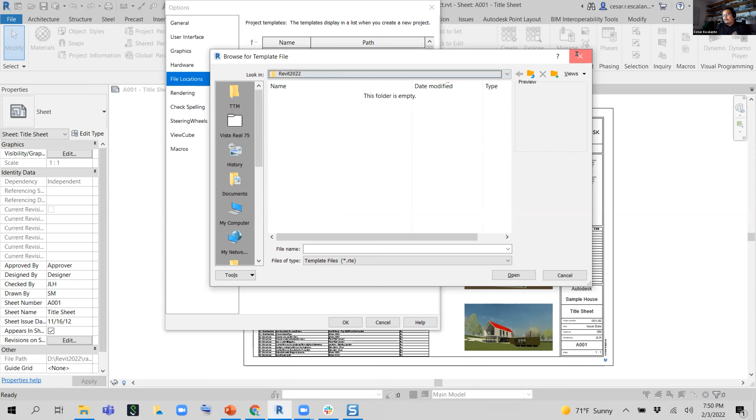Now, if you're working in your office, probably your BIM manager has directed you to add a path to the company template, which usually resides somewhere in a server. So if you're in an office environment, you probably have a server location as well if you have local templates. But this is how you add more. So if you're missing some templates and you know they're living on your server, you can add a value and then browse for a place in your server to connect to your template. If you don't know that path but you know they exist, you probably have to ask your organization or the BIM manager. But these are the ones that ship out of the box: some imperial construction, architectural, structure, and metric.

The other one is this path, which is the default path for user files. So when you open Revit and say file open, Revit opens at the location where it's going to look for files. I think that's what this path is. It's also the path where local files in the work sharing environment are saved. We're going to talk about work sharing towards the end. So when you create a local file, this is the local path where it's saved.

Some organizations standardize this path. I remember when I was working at HOK, it was C Revit local, and everybody had a Revit local folder on their workstation. So when they opened the central file, the local file was saved in this path. And then the other one, which I think Joe was talking about earlier, is this one, which is the default path for family templates. This is pointing to a place on your local workstation.

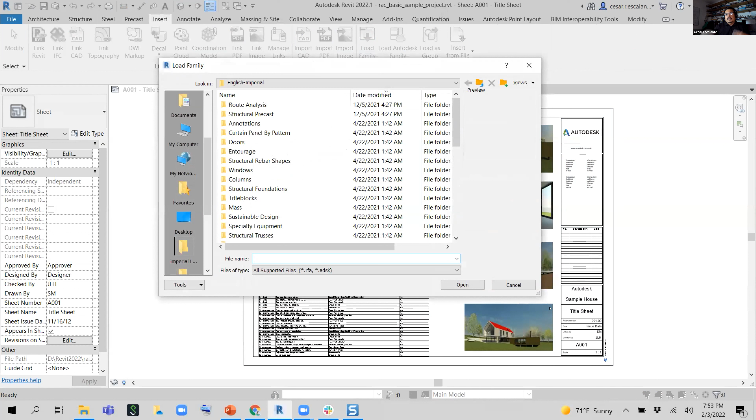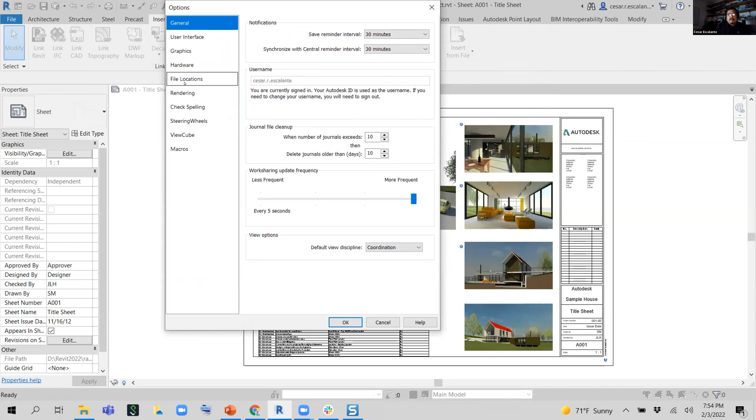So if you are loading a family, you go Insert, Load Family, and you receive a message about an improper file path, or you don't have the right path, that's probably what's happening: you don't have this default path set. You need to point Revit to where to load the default family template. So again, I'll repeat it: it's under File, Options, File Location, Places, and it's the Imperial Library.

All right, so hopefully that works, Joe. I don't know if you tried it, but hopefully that fixes the issue you were reporting at the start of the class.

Okay, the other topic was some basic 101 concepts that I need to refresh. I didn't talk about this last class, and it's on this slide here.

So Revit has any model representation, any virtual model representation in Revit has three types of building elements. You have building elements as model elements, datum elements, and view specific elements. Again, this is Revit 101.

I don't know what's going to happen next Thursday, but on the next test I'm going to ask you this: what are the three types of building elements? You have model elements, datum elements, and view specific elements.

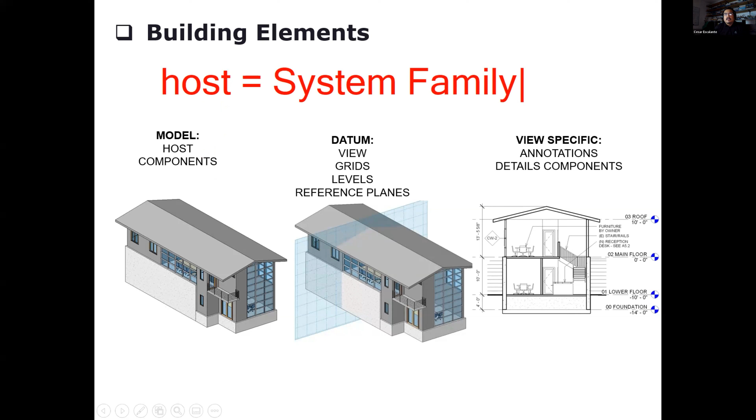A host is also called a system family. System families are elements that you cannot load inside Revit. For example, walls - you cannot save a wall as an external component. You cannot save a roof as an external component.

System families are families that only live inside a project. That's why they're called system, because they are only available in the context of a project, but you cannot save it or export it.

You cannot make a system family a component. The reason for that is that system families are typically created by a set of custom boundaries.

An example: walls have boundaries, they have sketch boundaries. Roofs have sketch boundaries. Ceilings have boundaries. Floors have boundaries. Elements in Revit that are created using sketch boundaries are called system families.

So examples of system families, I mentioned already, and I'm going to show you how to create a floor today. That'll be your first experience on how to create a system family.

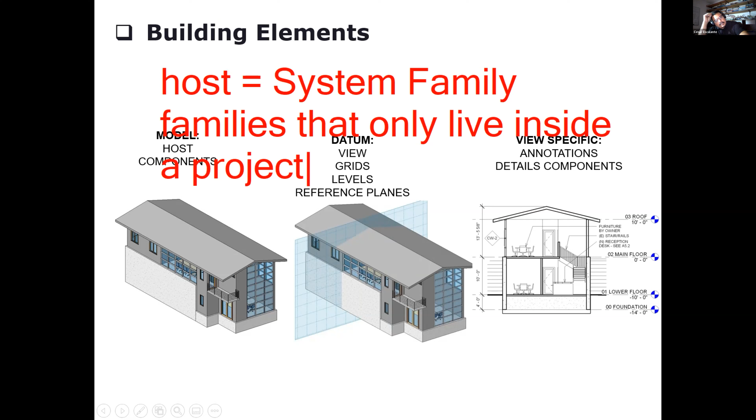Datum are objects, usually reference planes. These are work planes that intersect the model. A view by default is a reference plane - you're actually sectioning the plan either vertically or horizontally to get a projection view.

The grid lines are work planes, and they're work planes that span multiple levels and are aligned with the representation of a column grid. A level is also a work plane, and they remain associated with the top of the finished floor. That is where a level is.

Then you have custom reference planes that are used to drive and create any type of geometry. So views, grids, levels are called reference planes.

Then we have view-specific objects, which are elements that we place on top of a view that describe the design intent of an element in words. So annotations are all view-specific.

When you place a keynote or a call out or a leader, those are elements that live on top of the view, and they are view specific - that's why they call it that. If you place it in the floor plan, they only live in the floor plan, they don't live with the model. So if you're coming from a CAD background, it's equivalent to having things placed on paper space.

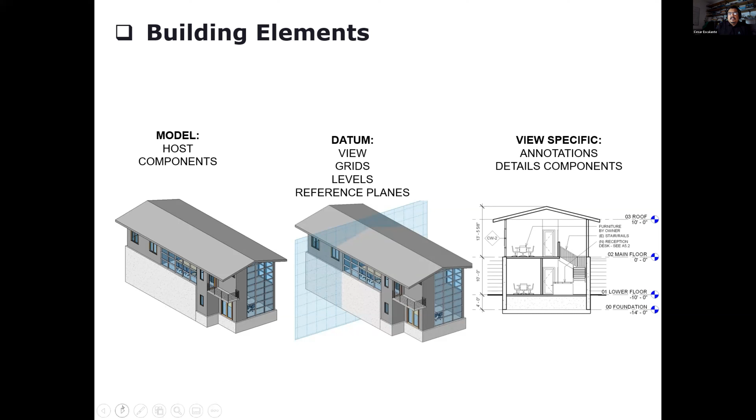So remember, model, datum, and view specific objects are the three types of building elements. Here is another way of representing this idea.

Model elements, you have host and model components. Datum elements, you have grid levels and reference planes. And view specific elements, you have annotation objects like text, tags, symbols, and dimensions.

You also have detailed components, which are enhanced two-dimensional representations that are placed on top of a three-dimensional object to enhance the communication of the view. So detail lines, fill regions, a hatch that is placed on top of a view - for example, that is a view-specific element.

And this is how elements are organized. Why is that important? Because I want you to understand, when you are in Revit and you're looking for a specific type of wall, remember that a wall is a system family. If you load a family, you're not going to find a wall folder in the Imperial Library. You're not going to find roof in the Imperial Library. You're not going to find ceilings in the Imperial Library.

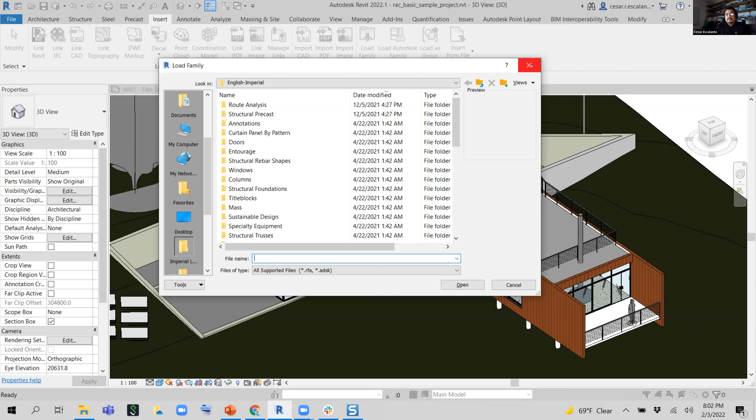System families cannot be shared as independent files, and the library of components does not have that. They only live inside a project. So how do we share system families? You can copy paste it.

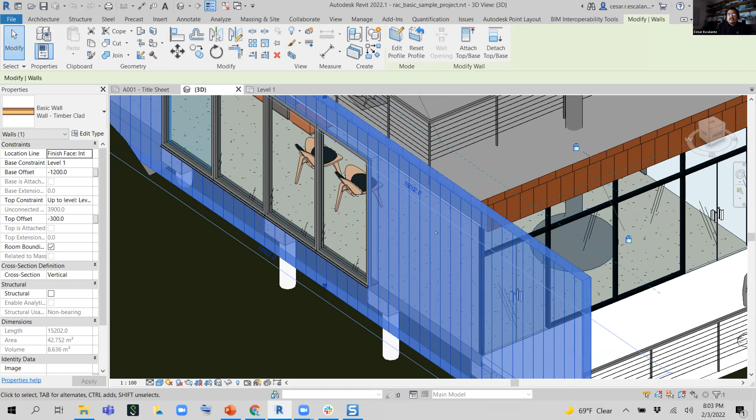You don't have to do this, I'm just doing it to show you. I'm going to create a new project from scratch. And let's say in this 3D view, I really like the treatment of this timber wall file. Rather than building it from scratch in the other project, I just copy it to the clipboard. You can do Control-C, then jump into another project, and do Control-V.

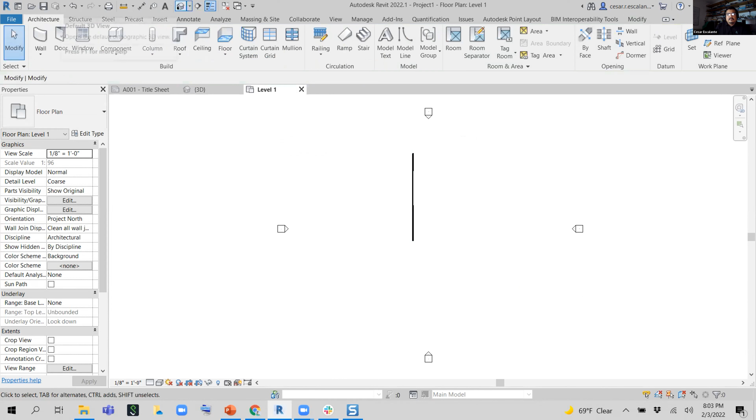It also brings hatch definitions, and you place it. As soon as you place it, this type of wall is available as something that you brought from another project. So the timber wall is right there, and it comes with all the hatch definitions. Copy paste is useful when you have spent a lot of effort in another project.

But then if you're going to start copy pasting from multiple projects, that is a problem, right? So a strategy that a lot of companies do is to create their standard of walls into a single project. And then they build this collection of walls that's sitting in the central server. All you need to do is grab the interior partitions you need, and then paste it into your project. That's one strategy of dealing with that.

Let me see, I may have placed in the D drive an example of that. Yeah, it was in this one, it was in my wall... No, I don't have it. I'll bring it next time. I need to dig into my files.

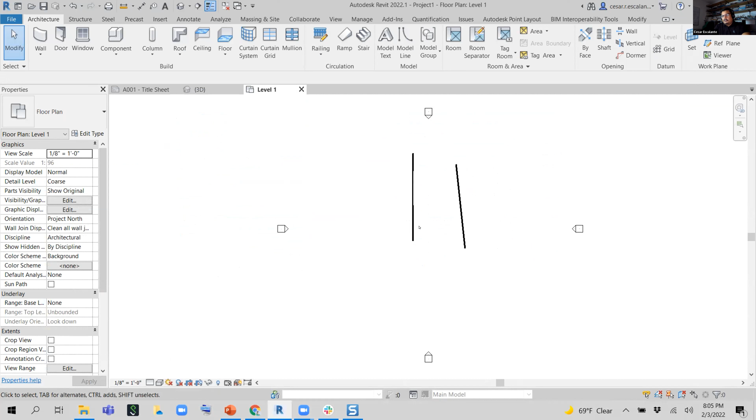But it's a repository of walls, nicely, neatly organized with the right tags, the right information, and rather than rebuilding it every time from project to project, you just copy to the clipboard and paste it, and that's the way to distribute those type of families. But it's a Revit project, it's not a Revit family. So the bottom line: system families cannot be shared as external files, and system families only live in the context of a project.

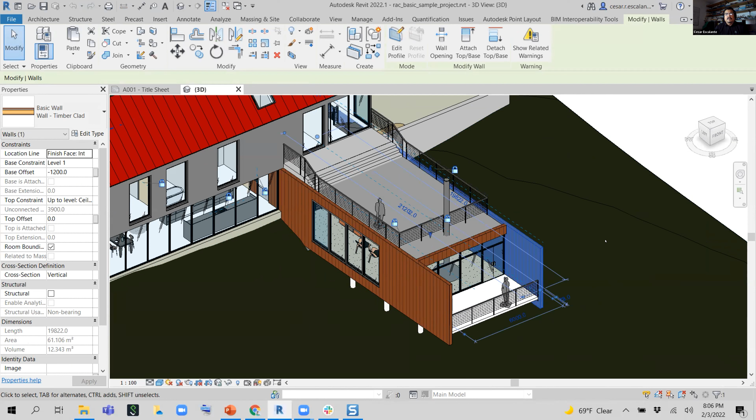And system families cannot be... you can share system families using repositories of elements. So how do I know if something is system or not? It's by accessing something called the type properties. I'm going to talk about that now. This is called type properties.

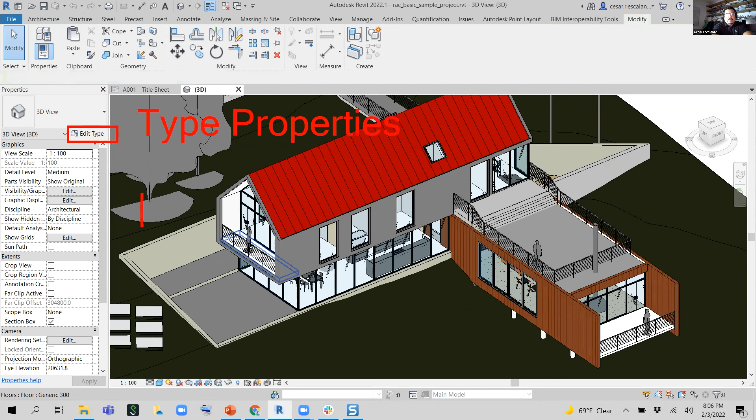A type property is a parameter common to elements of the same type. In other words, every wall that is a timber clad have similar dimensional properties, and that is a type property. If you change the dimensional property of that wall, it changes for all the walls of the same type. Another example, doors: if the type of a door is 8 foot high, all the doors with that dimension, that is a type property. If you change that property to 9, all the doors are going to change to 9 foot high.

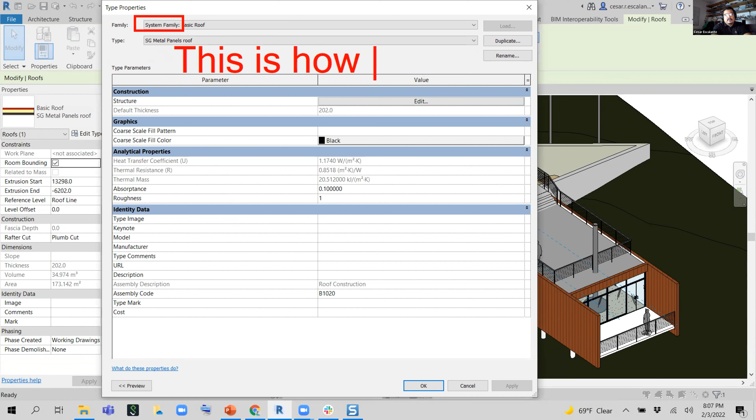When you access the type property of an element in the property window, you're going to see that right at the very top it says system family. This is a roof. This is how you find if something is a system family, in case of doubt.

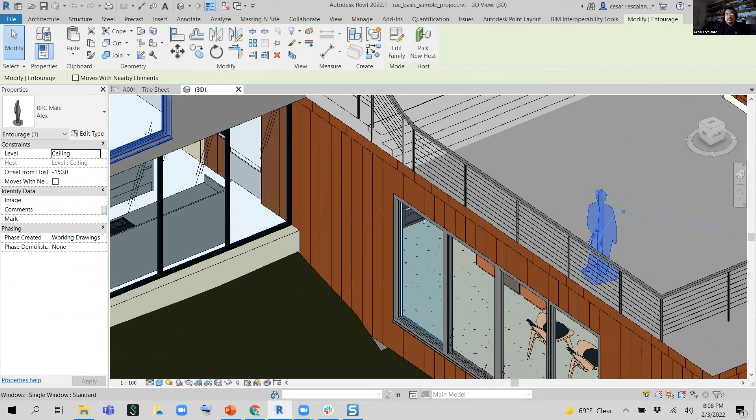Let's see this guy here, his name is Alex. Is Alex a system family or not? You edit the type and notice that it doesn't say system family. Therefore, this is a loadable component, it's an RFA. But for the most part, the rule is that things that have big areas are system families.

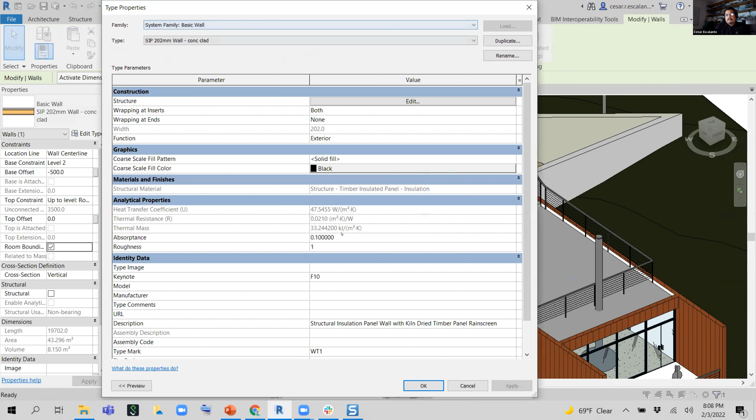I'm going to pick this wall, for example, and edit type—it's a system family. Now I'll select this other guy, which is a fireplace, and that is not a system family. That's a component. That's a visual way to check if something is system or not.

And why is this important? Because it impacts the way you exchange information with other models. The project browser doesn't display that information. When you go to the families, this is a collection of loadable components and system families, but it's not clear here, because you can see walls, ceilings and floors, but it doesn't tell you whether it's system or not. So I wish there was a way to sort them out so you know what you can share and what you cannot share.

All right, back to my slide.

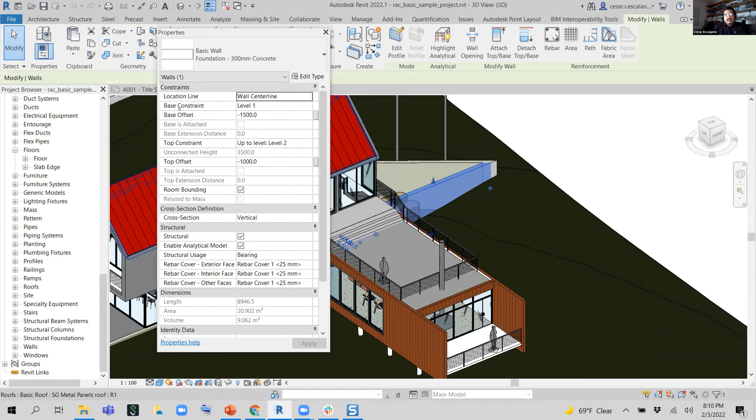Parameters: there are two types. The window properties display two types of parameters. The parameters that are unique to an object are called instance parameters. When you select something on the screen, anything displayed in the property window is called type, instance, family, instance properties. An instance property is a parameter unique to an object, to an element. So if you change the instance parameters, it only changes it for that object, not for the entire collection of types. Instance and type is an important concept because when we create families, we need to decide whether a parameter is unique, an instance, or a type.

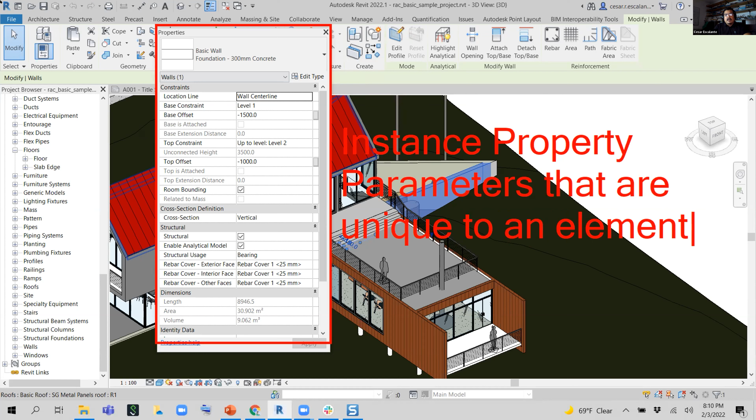If you click edit type, these are the properties of all the types. If you change it here, you change it for all of them. And the properties you see in the property window are instance parameters. That's going to be on the test next time, so it should be a breeze.

Type versus instance, and why is it important? Because when you create a new project parameter - a project parameter is a custom piece of information you add to something - let's say I want to add a new project parameter to the doors, whether it's purchased or not, you need to decide if that parameter is going to be a type or an instance. When you create custom pieces of information, you decide whether it sits as a unique parameter on the property window, or sits inside edit type. So when we create custom parameters, we need to decide whether it's type or instance.

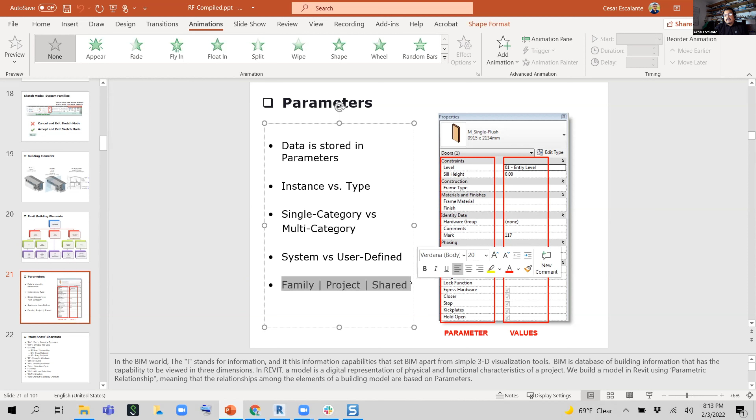Instance and type parameters can be single category, meaning they only apply to a specific category, or they could be multi-category. For example, everything listed under identity data is usually a multi-category thing. Material is a multi-category parameter; you find material across multiple categories. Then we have family parameters, but we'll deal with this when we create custom content, a family from scratch. If a parameter is created inside a family, it's called a family parameter. We're far from getting there.

All right, this is a summary of what type and instance is: instance properties and type properties.

The other thing I want to cover before moving to creating a new project is view creation, because I think for a beginner it's important to understand how to create views and navigate through views.

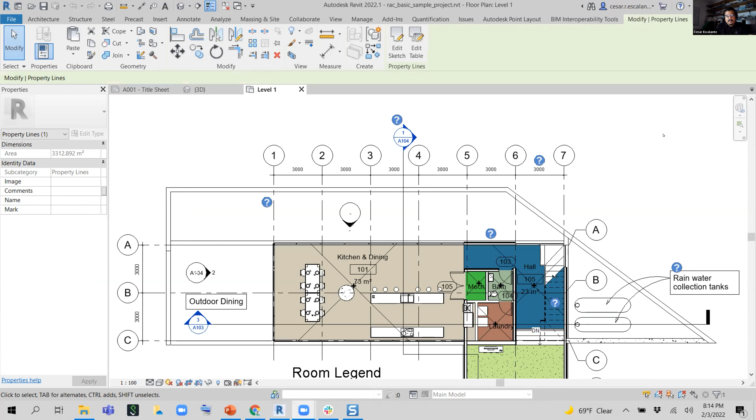In the project browser, you can close and open the browser as needed, and move it to either side, along with properties. I think I pushed the property window, my project browser, down and it went beyond the screen. Let me see if I can disconnect this.

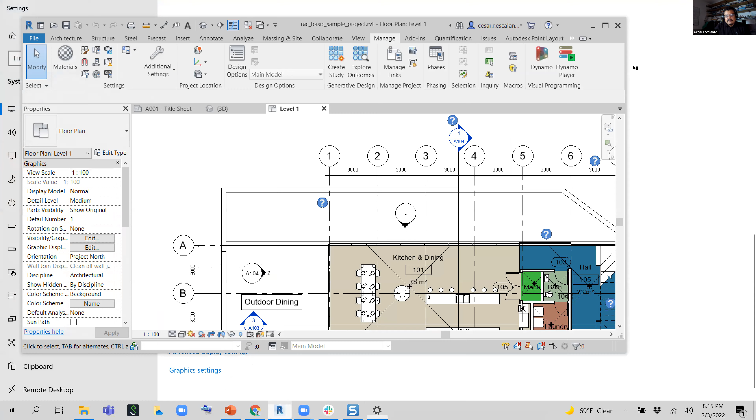Last thing I'm going to try is to close it. Are you guys still with me? Sorry, I need to troubleshoot this. I'm going to close Revit and reopen it again.

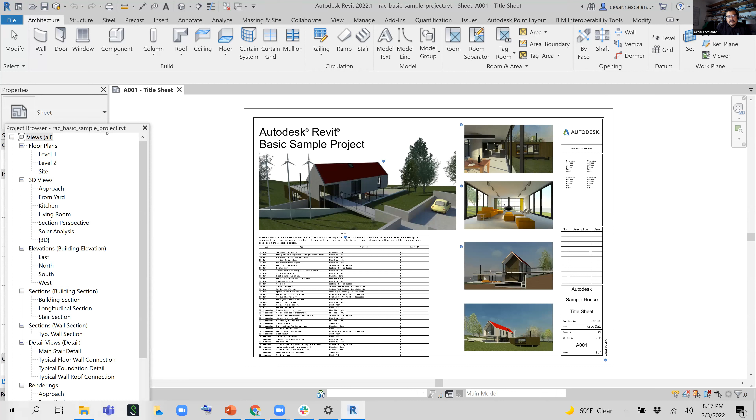There's my project browser. Yeah, usually restarting it does the trick. I was just trying to place this below the property window. And it goes. Right, okay.

So what I was saying is that you can navigate through different views in the project browser, but what I want to show you is how you can create new sections and elevations, because that's important for a beginner.

To create new sections, you go to the View tab and hit the Section tool. A section tool is a datum that splits the model at a specified work plane. Sections are work planes, and that can act as reference planes where you can host objects in the work plane defined by a section.

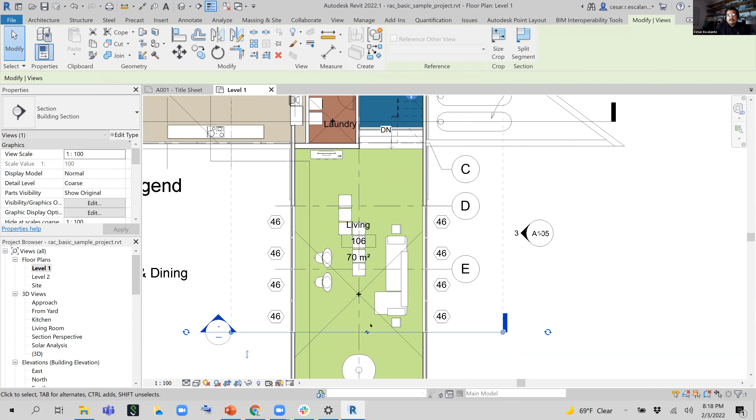So when you hit section, you hit two points on the screen. This is point number 1, this is point number 2. You can do it anywhere. I open Level 1, and a section has a head, it has a tail, and it also has the section extent, which is how far in space you can see the depth of your scene.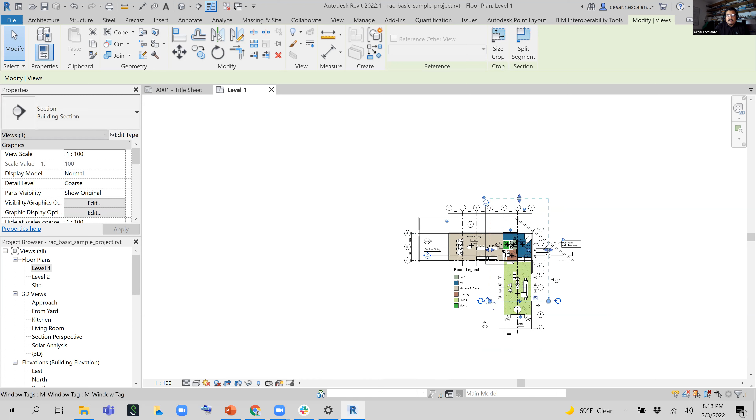These handles that you see here allow you to move the far clip extent. And to access a section, you just double click the head, and that will take you to that section I just created.

I'm going to close it and create another section. Feel free to do this with me as well on your end. Go to the View tab, hit Section. The first click brings the section head, the second click brings the section tail.

The orientation of the section can be flipped. If you click this icon with a double arrow - no, sorry, this double arrow here - that's going to flip the direction of the section. This double arrow at the end of the mark just swaps the section representation to a tail, a head, or nothing.

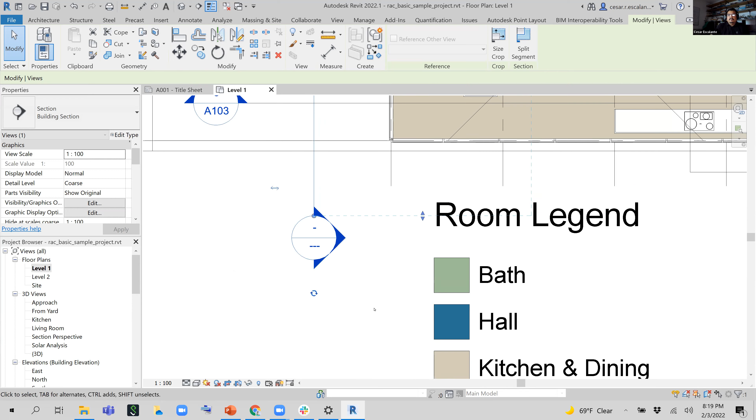And then an elevation, exterior elevation or interior elevation, can be created under the View tab, Elevation. Elevations are system families, and then you can choose. This is giving you the option to create a building elevation, and you just place this section.

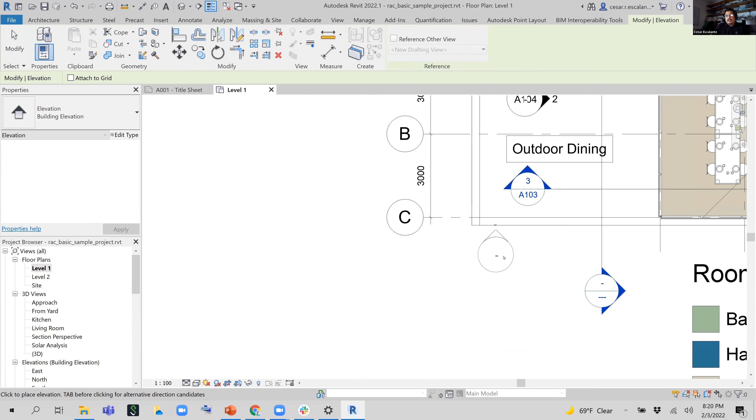Notice that the section tries to align to the closest geometry. I'm going to create a section of these, an elevation of this wall, and just place it here.

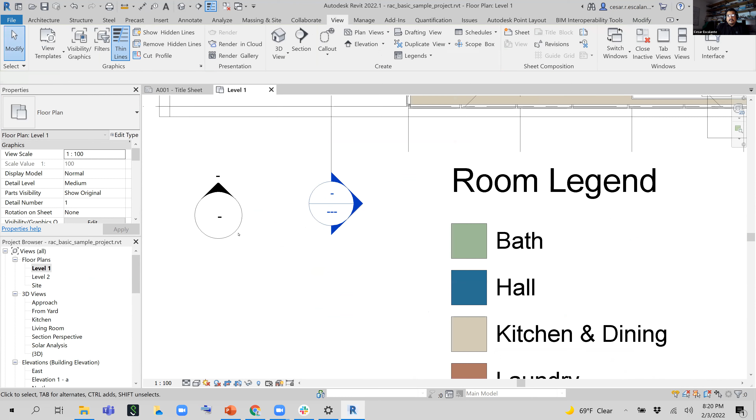A word about elevations, and that's also true - this floor plan, Level 1, has other elevations here. An elevation marker has 2 components: the arrow, which is this thing, when you select it, is actually the view, and that's what you see here - this dotted line, this blue line. That is a representation of the view, and then it also has the marker.

So if you move an elevation away, you might think you're moving the view, but it's not. If you click the arrow, notice how the view still remains in the back. Any question here?

So to properly move an elevation and the view, you need to pick both things. You see there are 2 elements selected here, and 2 elements selected here. You select the elevation marker and the elevation view.

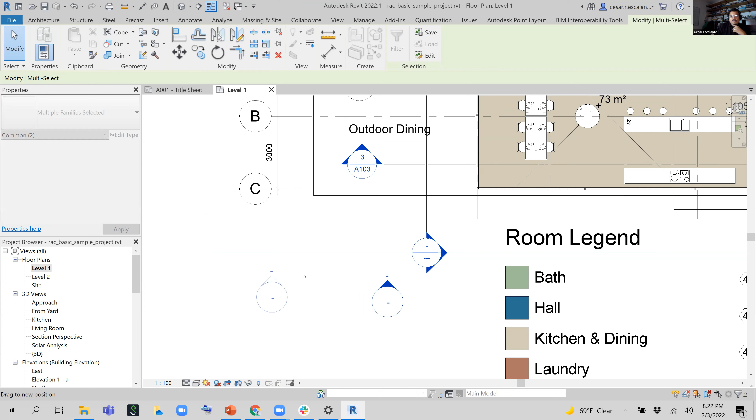And if I do this, I'm actually relocating the work plane associated with the elevation, so now I'm moving the blue line as well. But know that if you're happy with the location of the work plane, just leave it where it is, just move the marker. But if you're trying to move the elevation work plane, you need to select the two elements - the view and the work plane.

Okay, because we're going to deal with that later on, and I want to just tackle it now. All right, that's how we create simple views. I'm going to go into a different class about other types of views. Any question on this? Simple, right? Okay.

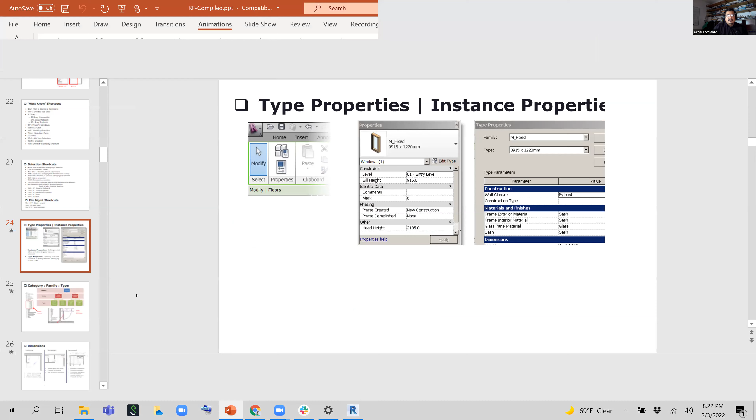All right, let's go, it's that time already. No, I still have time. Let's talk about the Mila project.

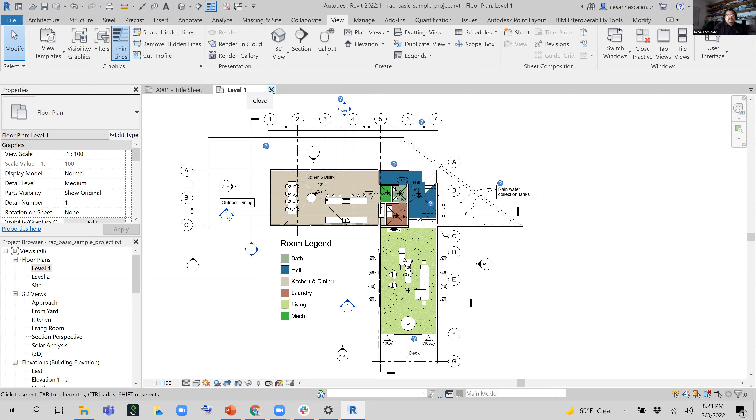So the Google Drive, I have it under the Mila folder - there's a lot of pictures there as well. This is the house we're gonna do. It's an actual project, it was featured in a magazine, multiple magazines. I just did a search of nice modern Nordic houses in ArchDaily, and I liked this.

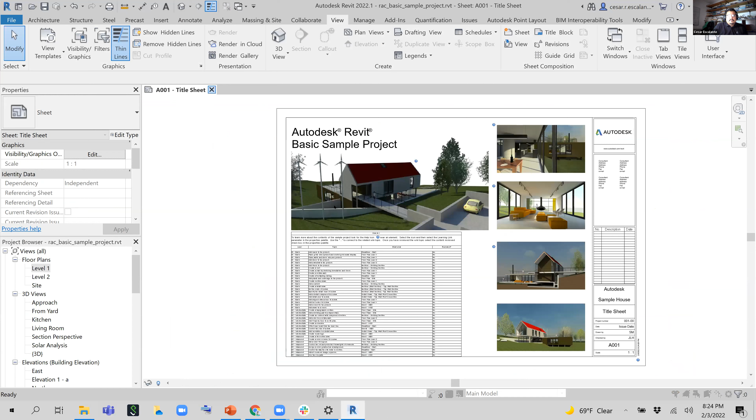This is simple and it will be super easy to use as a reference for learning Revit. We have walls that we're going to use, roof, floors, small furniture, kitchen furniture, and I'm going to use this as a way to get us started learning Revit. So open the file, close this file - we don't need it anymore - and open the file called Mylla Hytt Start.

And if you want to know more about the project, who did it and where it is, just search the Mylla Hytt House, and it's like everywhere. It's by Mork-Ulnes Architects. Beautiful house. Wish I had one like that.

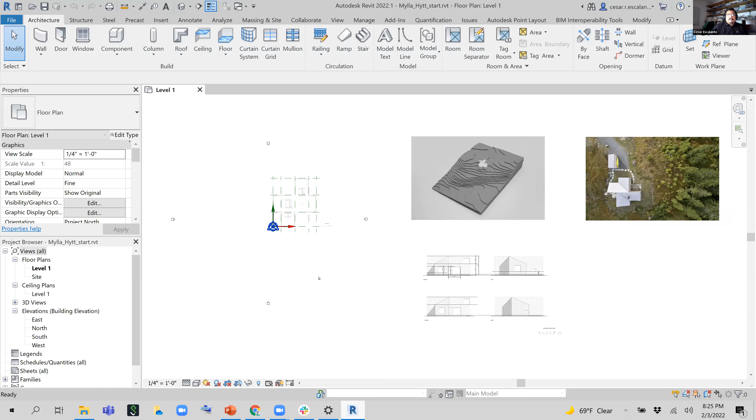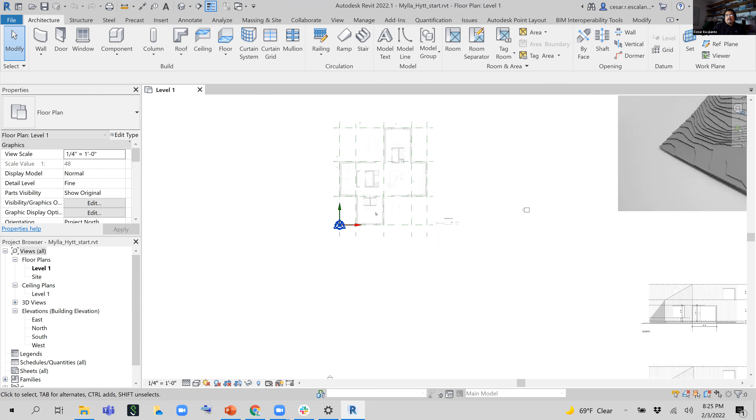When you open the file, Mylla Hytt Start, open level 1. All I did was crop some images from the website and scale them—I don't need to teach you how to scale an image right now, we'll do that later. I just wanted us to have a common background on how this house is going to get built. These are images scaled and sized in feet and inches.

All the different facades—the reason I bring this up is because we're going to compare the Revit elevation against what is published in a magazine, and you'll see it gets very close. So if somebody tells me Revit doesn't do good graphics, I think that's wrong. We need to understand how to control the graphics in order to achieve what we want.

So this is the floor plan of the house. It has 2 rooms, a kitchen, 2 little restrooms, and a nice cabin. I have placed the reference points so that we have the same snap points when we build this.

We're going to do this very quickly and then we're going to stop. I want to show you how to create an in-place mass, because what we're going to do is create a mass representation of this building, and then stop there. So I'm going to do this myself first, and then we're going to do it together because I want you to see the process. I'm going to repeat this twice.

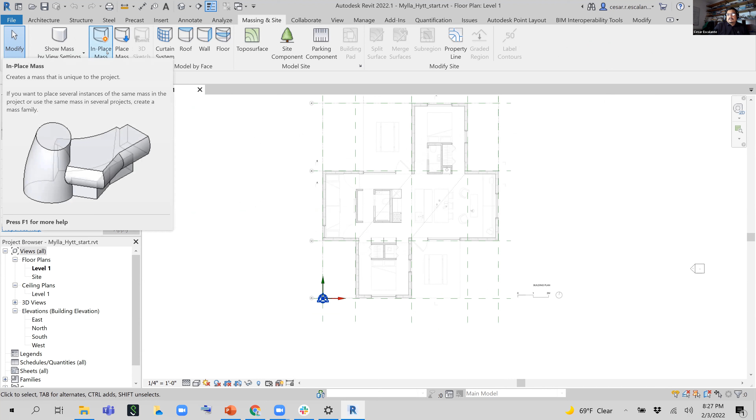It tells you it needs to switch the visibility on—that's fine, just click close here. And I will call this the east side, east mass or east massing. Again, we're going to do this together.

The mass environment is asking me for a boundary that it can extrude. I'm going to use lines to trace the floor of this first half, snapping to the intersections. We're going to do this again together and close it.

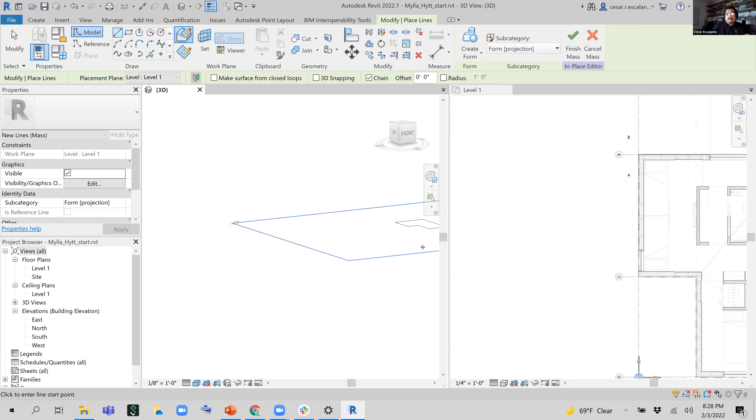After I close it, I switch to a 3D view. I can actually tile this to see the 3D view and the plan together. Then I select the area I just created and create a form.

According to the sizes of the house, the tallest spot is 16 feet high. So what I'm going to do is change the location of the top plane to 16.

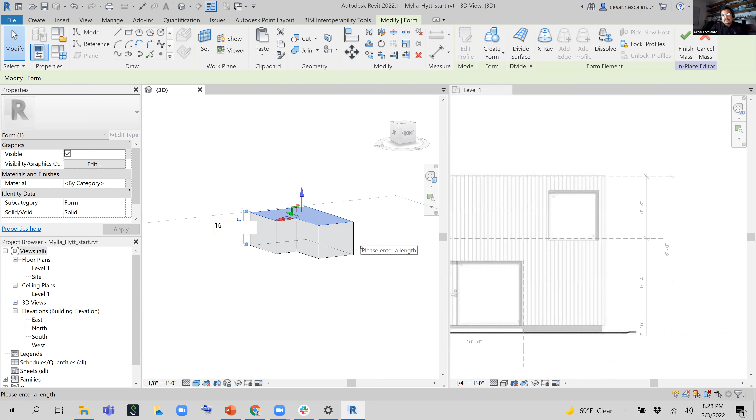And then change the elevations. So what I'm going to do is select this edge and change it to 9'4", which is what you see on the right side. Then I'm going to select this corner and change it to 9'4" as well. And that is half of the house.

So then I finish the mass and I'm done. Let's do this together—I'm going to delete this and redo it together. If you follow along and you're done, great. So I'm going to switch to the floor plan again here.

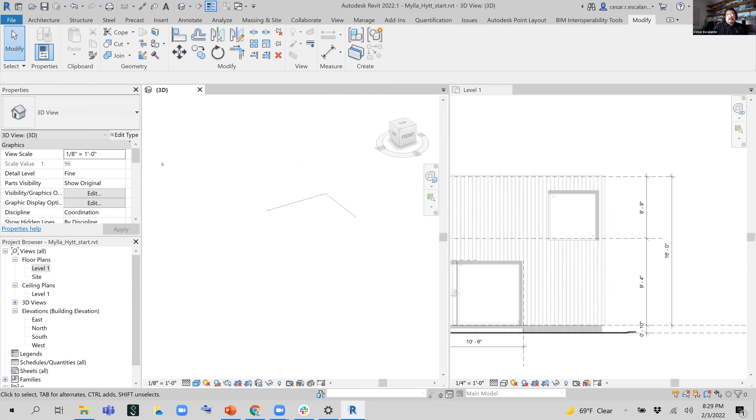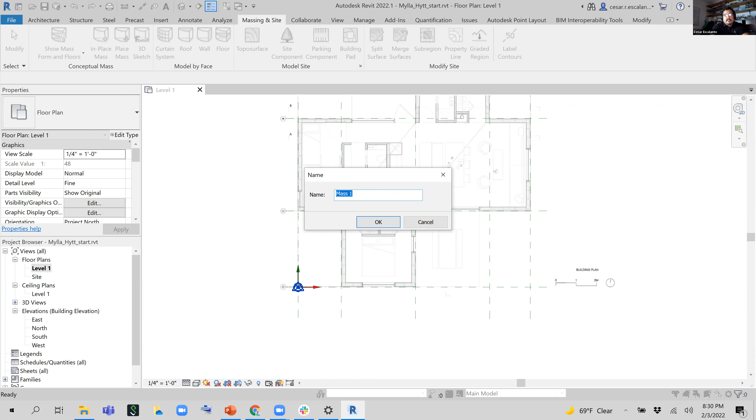Zoom over—we're going to go to Massing and Site and create an in-place mass, give it a name. I'm going to call this East Massing. Then using model lines, hit the line tool in the draw tools, the first icon, and create a boundary.

Create a boundary around the outer edge of the building envelope in the floor plan. So I'm going to start here, here, here—you'll automatically feel it snap. Then close the boundary, and when you close it, Revit automatically creates an area.

You may want to switch to a 3D view by going into the default 3D view. That switches to 3D view—that is the area created by Revit in the massing environment.

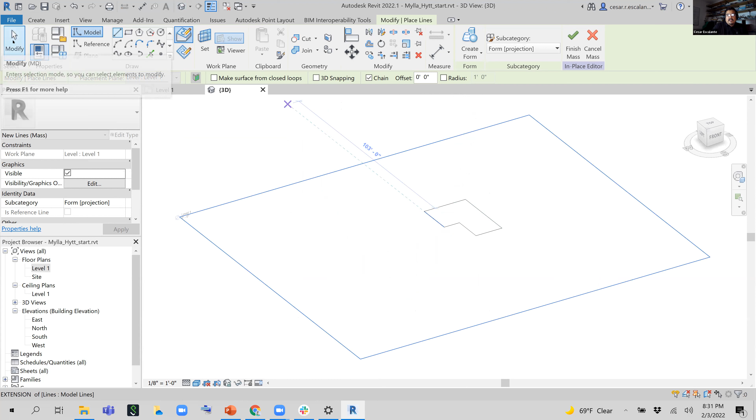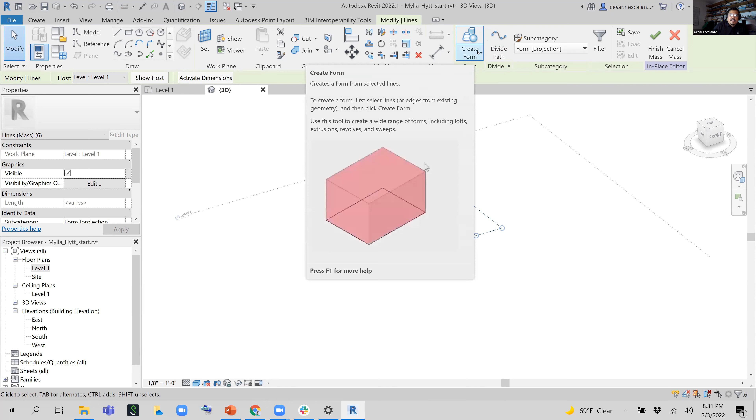Hit the modify tool, or hit the modify arrow to stop creating boundaries—or you can just hit escape. Then select the areas and extrude them as a form, creating this mass.

So it's very straightforward: create a boundary, escape, then switch to the 3D view, select the chain of boundaries, and hit create form.

And we're just going to deal with changing the height. So select the roof surface and change this to 16.4—I think, oh, 16.

In conceptual massing, you have the ability to access areas like complete surfaces. You have the ability to select edges, and you have the ability to select vertices. Just hover over, and then you can see you can select vertices.

You can manipulate each of them individually using these temporary dimensions. Temporary dimensions automatically place an object relative to the closest line intersection. So I pick the roof surface to change this to 16. Then I'm going to select this edge and change the dimension height to 9'4". When you type dimensions in Revit, you don't have to type the feet character, you can just type 9 space 4.

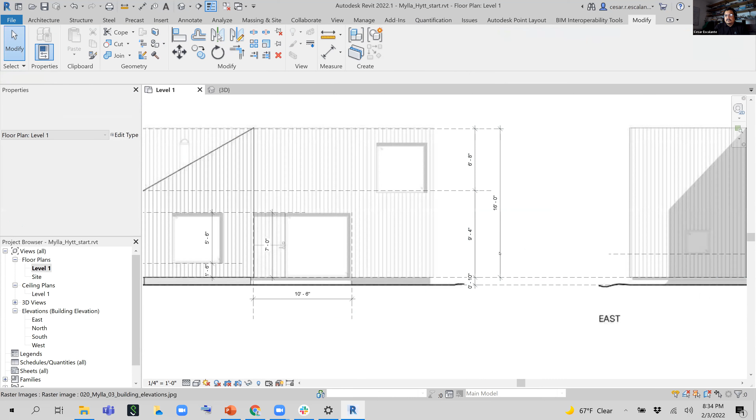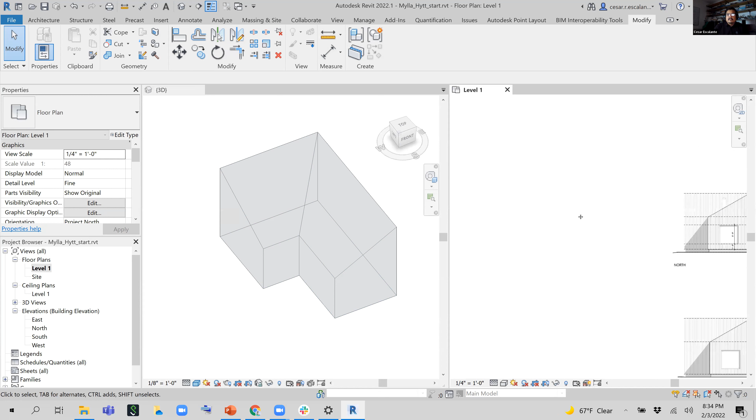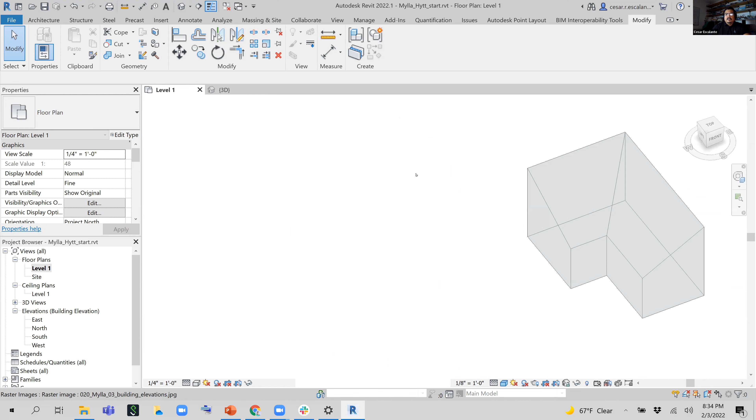How do you do the side-by-side view? Is there a shortcut for that? The shortcut for tiling is WT, wall tile, window tile. If you type it the other way, it's TW, stack it as tiles, as tabs. So window tile is WT, and tab windows is TW. Good shortcut to remember.

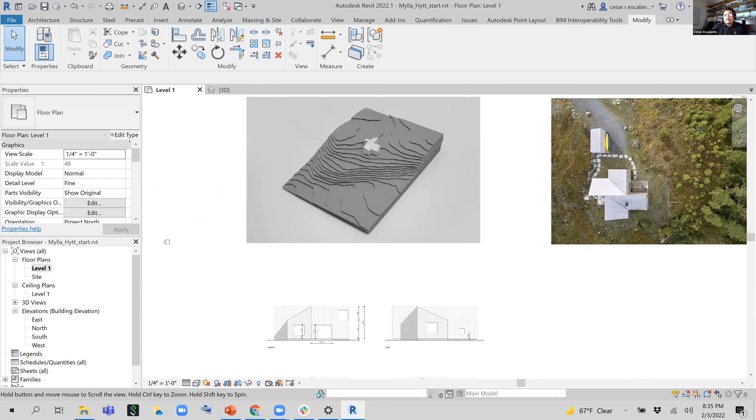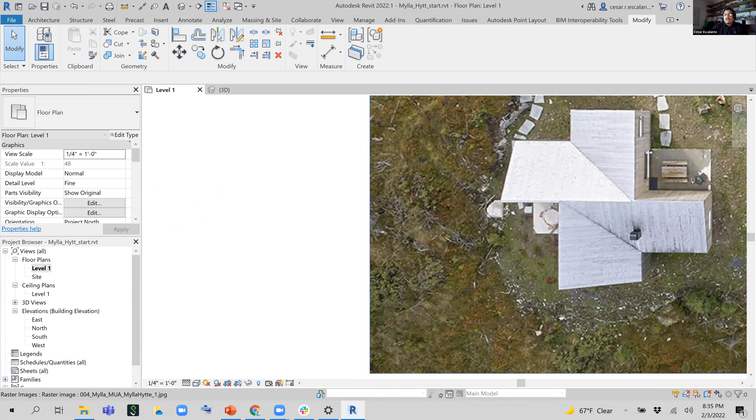We've reached past 30 minutes now. Maybe as homework, do the other half. Go to level 1 and do exactly the same thing, but in the opposite direction. This is like a mirror, you can just look at the 3D. These were the edges that we modified. Do exactly the same on the opposite end, but change this to 9'4" and repeat the massing. If not, we'll do it together again next class, next Tuesday.

What we're going to do with this mass is it gives me the outermost boundary of the house, and then we're going to use these faces to generate face-based walls, face-based roofs, and face-based floors. We'll talk about that next time.

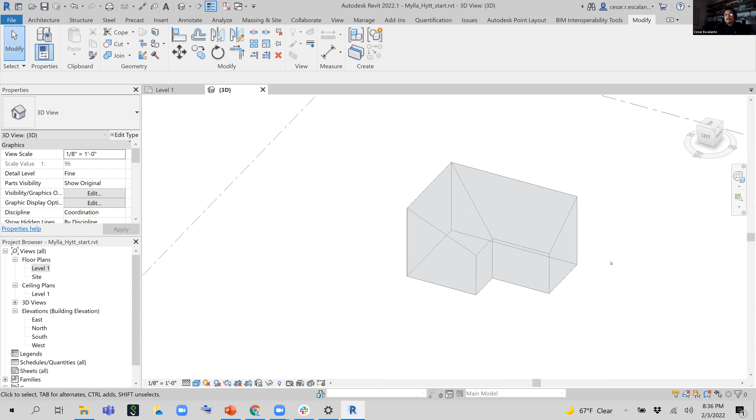We're also going to talk about the properties of the walls and creating custom walls, like how we can make a wall look like wood, how we add wood slats, how we change the material. And then we're going to add the windows, the doors, the curtain wall system, etc.

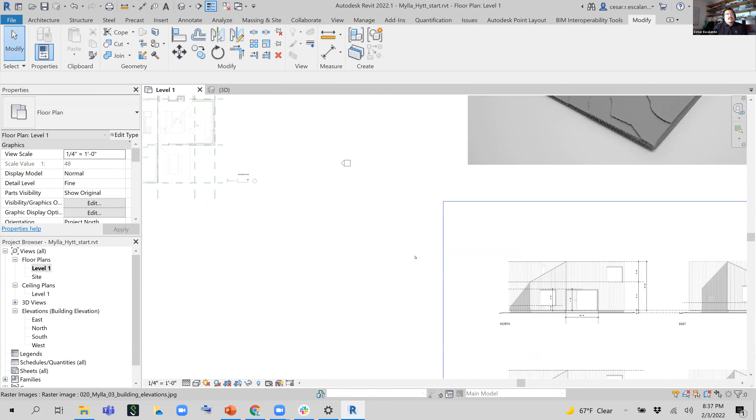If over the weekend you're really into this and want to try to figure out how to build this yourself, give it a try. For those who are intermediate Revit users, try to build it yourself based on the images and pictures you see on the screen, and tell me on Tuesday where your sticking points were. But we're going to do it together again on Tuesday.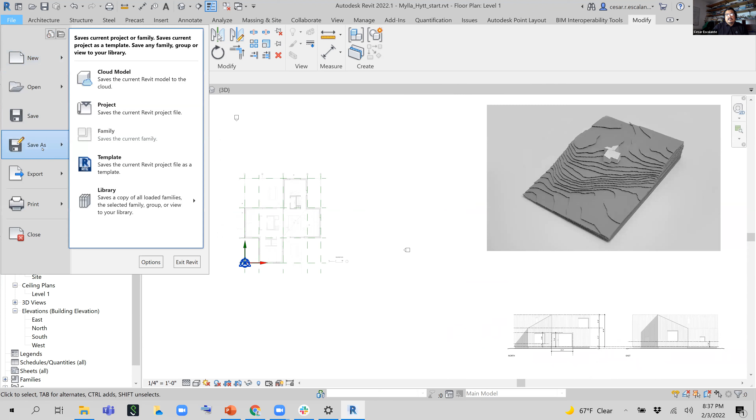Just save this file, save as. I'm saving all my projects on my D drive, so I'm going to save this as Revit 32, and then close it.

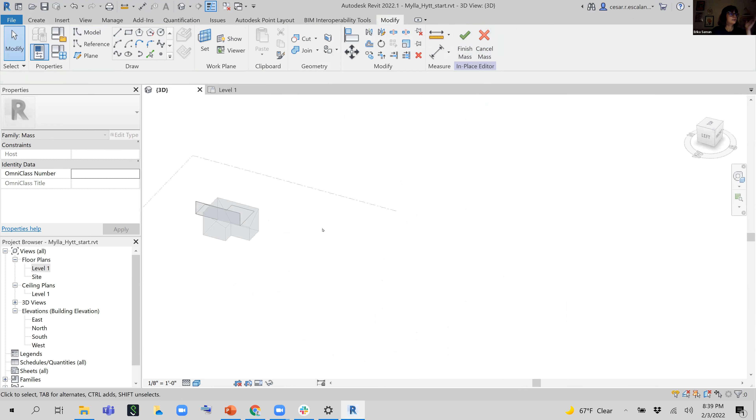To me it doesn't look like this, I think my ribbon looks different. Yeah, mine too. Oh, does it look like this? No, I'm missing all the commands. Yeah, oh you know what.

Okay, this is what's happening, you are trapped in sketch mode. To finish it, trapped in sketch mode - what that means is that from the previous command, you have to click this green checkbox that says finish mass to have access to all your commands again. Was that what was happening? No?

To extrude it, you go into Massing & Site or Modify. So let's do this, why don't you share your screen and I can help you?

You have to finish your screen share. Stop. Yes, correct. My cursor also wasn't snapping to the corners.

Let me be done with Erika first. Okay, so here's what happens: you finished the command without making the extrusion, so what you did was the area.

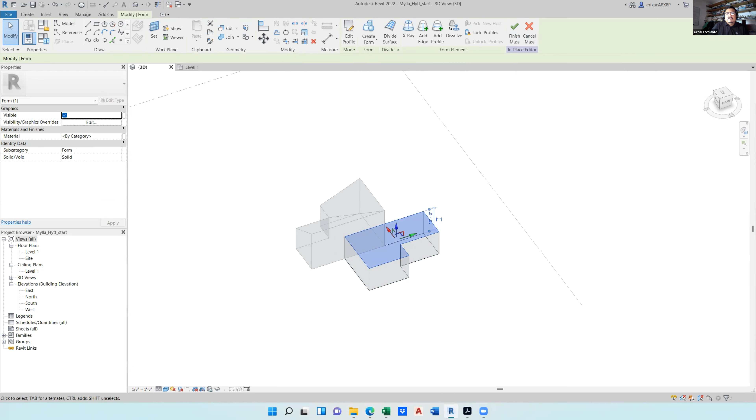Okay, Ivana, do you want to share to see what you're saying? Yes, let me see. Do you see my screen? Yes. Okay.

My Zoom is blocking it. So you know what happened? I think the image got displaced. You see how the green lines do not align with the boundaries like before? So you may want to undo.

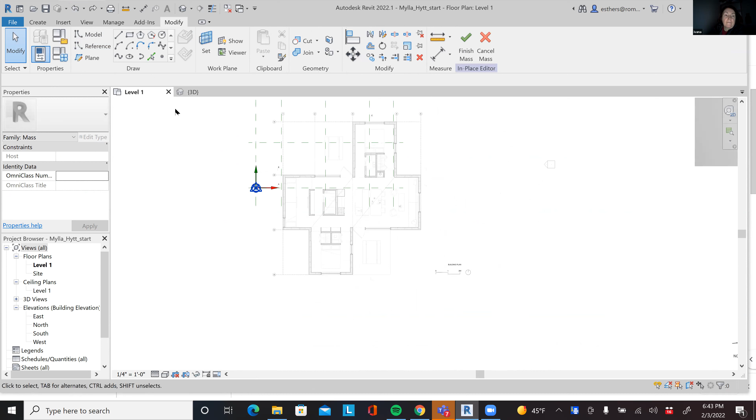Just undo everything. Undo, yes. But I didn't move anything. That's how it might have opened. I really mean, I can, yeah. No, because otherwise you wouldn't be undoing it.

I'll just close it, right? Yeah, no. And just open the Mylla_Hytt_start file, right? Mm-hmm.

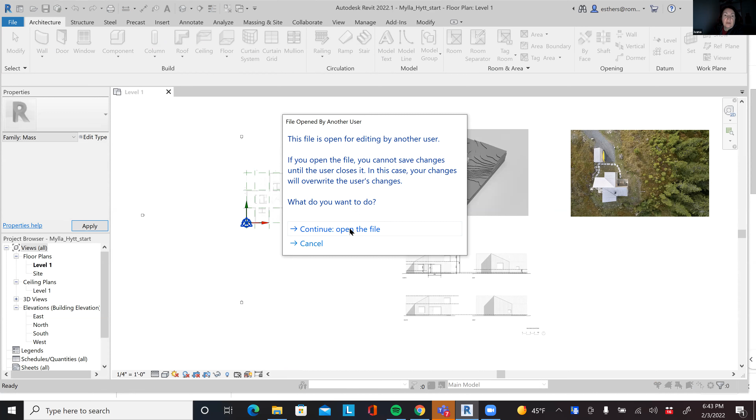Is this probably normal? It's you opening the file, yes. Probably you have two sessions of Revit open. And notice now the image is aligned. So what happened? Oh, I see. You know what happened?

Select the image and pin it so that it doesn't move. Oh, it is pinned. Yeah. Select it, there's a pin in the modify section of tools in the upper ribbon. Select the image, then in the modify panel there's a pin on the right side above the red cross. That pins the image so it's not going to move.

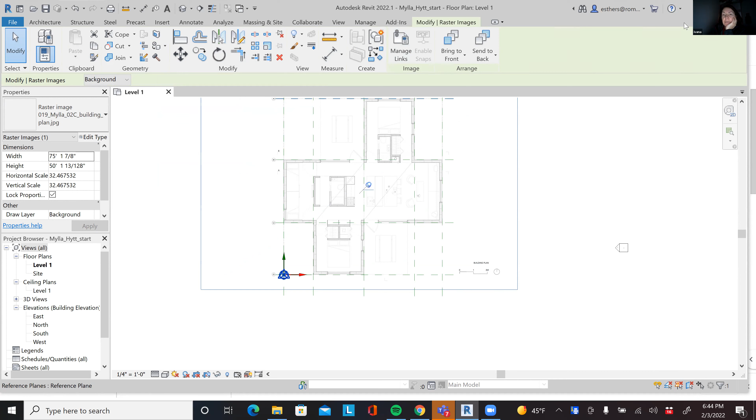Okay, and now it's going to snap to the grid intersections. Right, because my cursor was snapping to the line that was off of the wall. Right, okay, all right good, that should help. Okay, I'm going to stop sharing now. Okay, have a good one, Erica.

Anybody else have a question? I want to. Want to share, Sabito? Yeah, yes. I can't share. Yeah, Zoom has this green button, it's called share screen. Yeah, I'm clicking it, but it's not shared.

I believe you have to choose the right monitor after you hit share screen. Why can't I share? Hmm. You can, should I show you the screenshot? Okay.

But you will have to save the screenshot as an image and then upload it. So I was on Revit, on the plan, but how do I go to the 3D view? Remember the 3D house on the hill? Yeah, but when I go there, that ready house, I just see that.

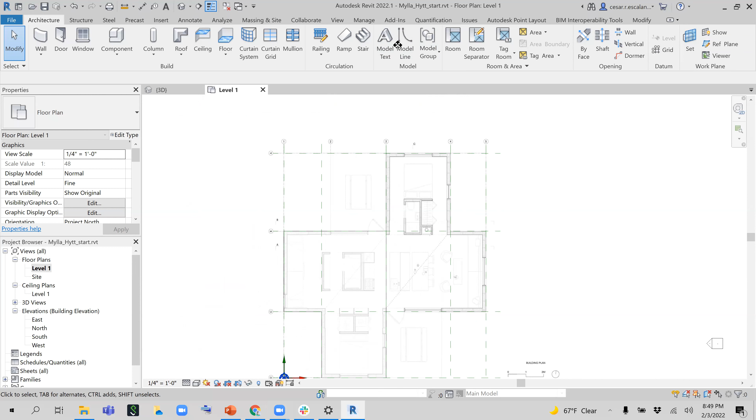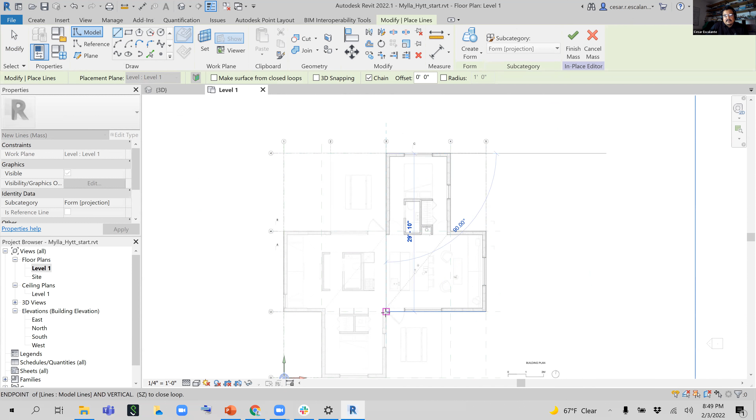And then I'm going to create a boundary of model lines, snap to the intersections. One, two, three, four, five, six, close it. Good. And then create a form.

I undid that. What happens is that it just selects the last object I created. So I undid, and then in the 3D view, I select the chain of lines, and now I create a form. Oh, okay, I make this, yeah.

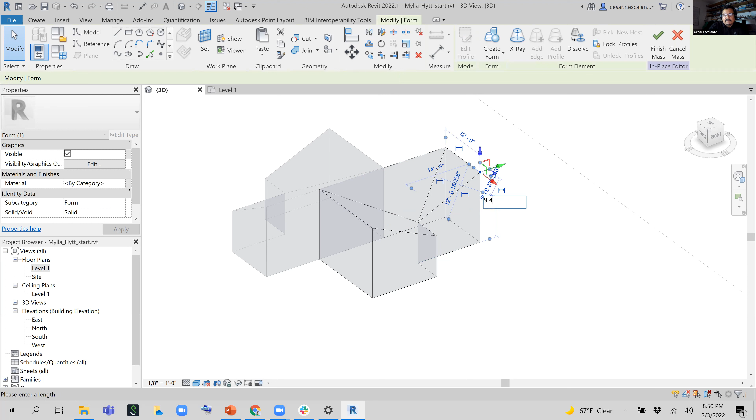16, and then select this edge, give it a 9'4", and then select the vertice and get 9'4". Okay, got it.

Thank you, I didn't do that create form. Okay, got it. So after creating the boundary, it's best to switch to 3D view, select the area, and then create form. Because you might experience what I just did, that only one - Revit selects the last segment rather than the entire form.

Okay, thank you. Okay, anybody else have a question? I don't know if Casey, Michelle, Jacek, no?

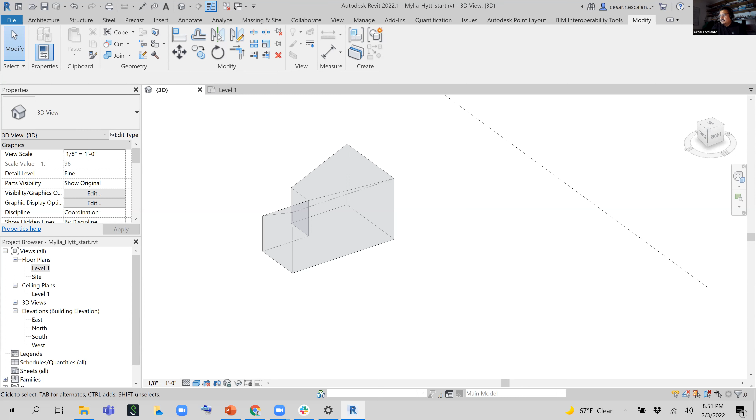I have a question, not exactly what we've covered so far, but if you're creating multiple masses, like if you're doing a building design and you had different alternatives, would you just have to hide and unhide masses, or are there kind of, would you create like 3D views with different masses on or something?

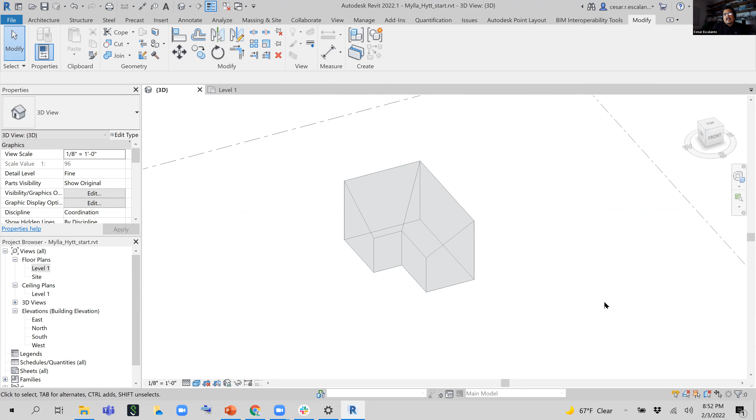We're gonna look, I think, towards class number 15 or 16, we're going to talk about design options. Design options is an ability to host geometry in different options, and then you display the options you want in a view. Under the Manage tab, you see where it says Design Options. That's another class I need to show, but you can create it.

Yeah, perfect, thank you, great. Thanks so much, have a good one.

Okay, night. So Cesar, I wanted to talk to you about something not directly related to the class. We have a prospective project that is mostly flat work - a series of plazas, stair ramps, and a pedestrian underpass. It's about 4 or 5, I would say maybe 60% of it is streetscape and 40% is these ramp stairs, and then a pedestrian underpass that goes under some streets and gets up.

And we're doing that with a large engineering firm, and they were trying to tell me how great it would be to do this in Revit. I told them that we're doing AutoCAD, we typically have been doing this as AutoCAD. And the scope would be split between civil and structural, so structural is doing Revit and civil is doing Civil 3D.